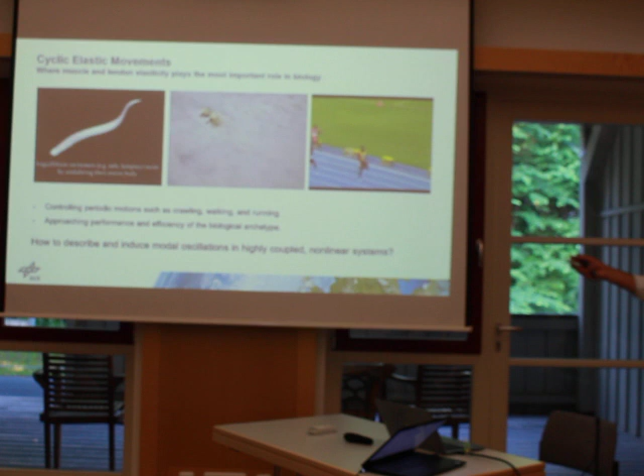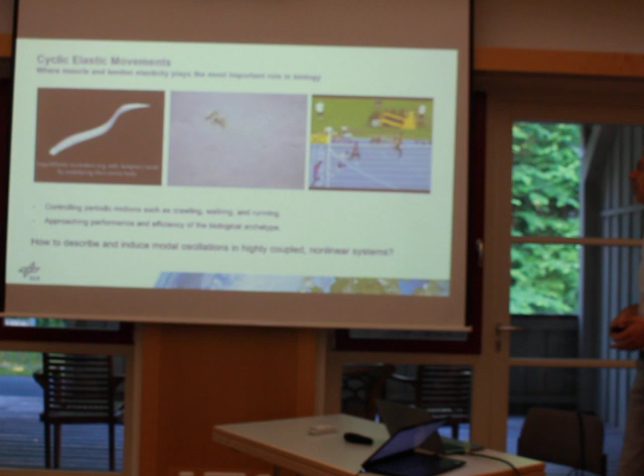So the motivation is well known. Biology uses the interplay between kinetic energy and potential energy to recycle energy over the gait cycle, and this is a highly nonlinear process. In engineering, we were taught about linear modes—everyone knows about linearization and linear modes—but what about nonlinear oscillations?

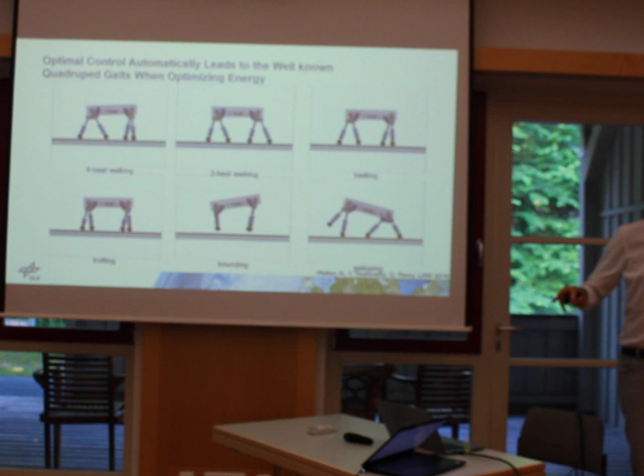We saw a beautiful video yesterday, referring to David's work, showing that for a quadruped, all the typical gaits can emerge. I think they achieved it through pure optimization on simplified models, with zero foot mass and so on. But for a conservative system, you can find initial conditions such that those gaits are just intrinsic motions of the coupled multi-body and elastic system.

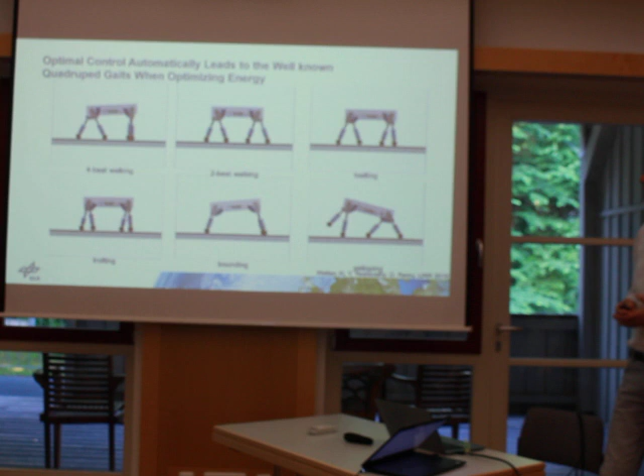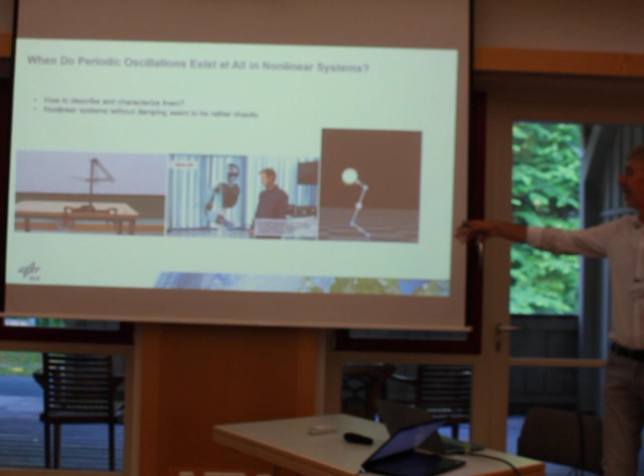So the question is—and it's remarkable—because our engineering intuition about multi-body coupled systems, like a double pendulum for example, is that they are chaotic. You can find on YouTube videos really showing chaotic behavior, and if you simulate that, you see very complex, chaotic behavior. So how does this intuition or experience of rather chaotic motion, when you have almost no damping, relate to the existence of these periodic motions as well?

This was the intriguing question I asked myself in my ERC grant, which will come to an end next year. And of course the analogy is that we model muscles and bones by spring dampers and multi-body systems. It turns out, for me at least, that the mathematical tool to analyze those nonlinear oscillations is differential geometry, and in particular Riemannian geometry on manifolds.

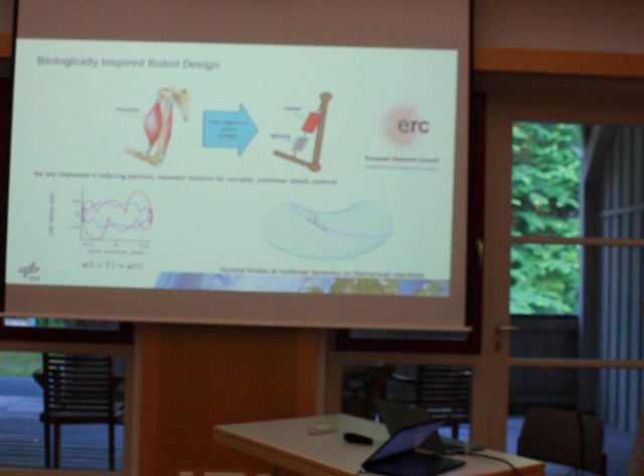So we are looking for periodic motions of highly nonlinear systems, and asking under which conditions they exist and how to find them. This is the main part I will talk about. And the basic notion to introduce here is geodesics.

I assume all of you know, maybe the people with a biological background don't know so much—what's a geodesic? Well, the geodesic is the shortest path between two points, and you get it by optimization. Of course, in Euclidean space it's just a straight line, but you get it by optimizing the integral of the norm of velocity, or equivalently the square of the norm of velocity, over the entire path.

Of course, on a manifold, something which is curved, there's no straight line. So what's the shortest path? Well, on a sphere we know it's part of a great circle, but what about on an arbitrary surface? Well, it's not a straight line, as you can see over here. So probably when you all flew in from the US, you took such a path, which is not a straight line, but is the shortest path on that map, just because of the curvature of the Earth. This is the direction an airplane takes.

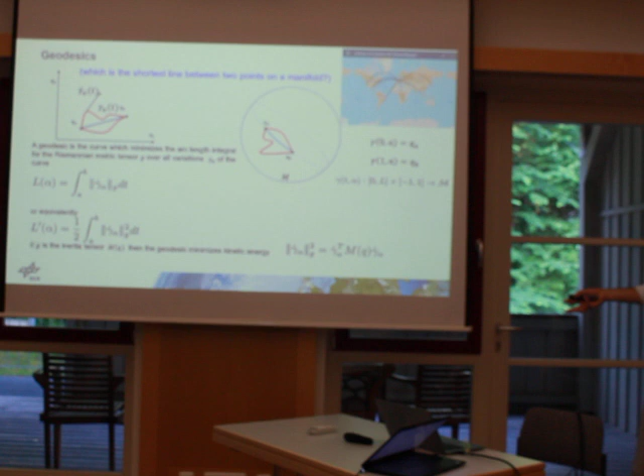And if you take as a norm for velocity the mass matrix, then you have kinetic energy basically. And the shortest path in terms of that, you can define specific metrics, and this brings us to the link between geodesics and multi-body dynamics.

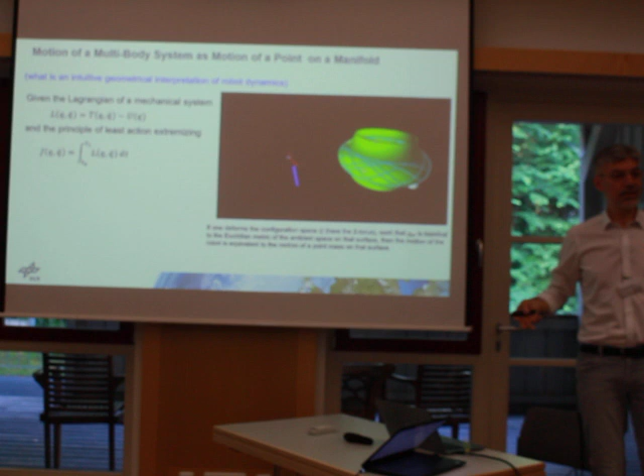Because we have the Lagrangian system, and first consider pure kinetic energy. We know that the principle of least action tells us nature minimizes the integral of the Lagrangian function, and if you have pure kinetic energy, then you minimize the integral of kinetic energy, which is just a geodesic in terms of kinetic energy.

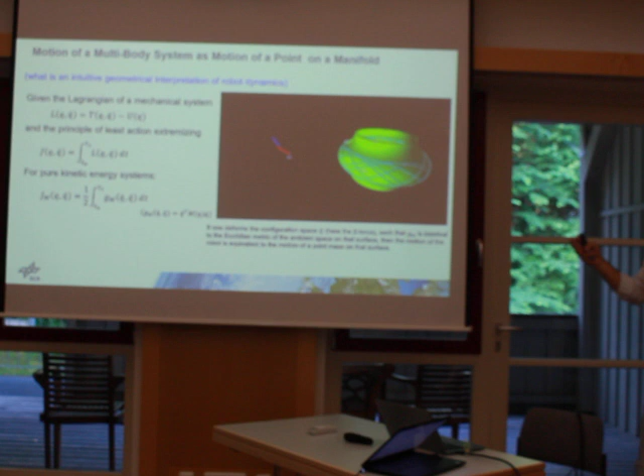So basically you can say that such a double pendulum is the same thing as the motion of a point mass on a manifold which is curved by the inertial tensor. By the way, we're not doing relativistic robotics here, but Einstein used the same interpretation in a different setup—the idea is the same: that a variation of the metric tensor can be represented as a space which is curved, and then you get rid of all this multi-body complexity—you just have a point mass and some curved surfaces.

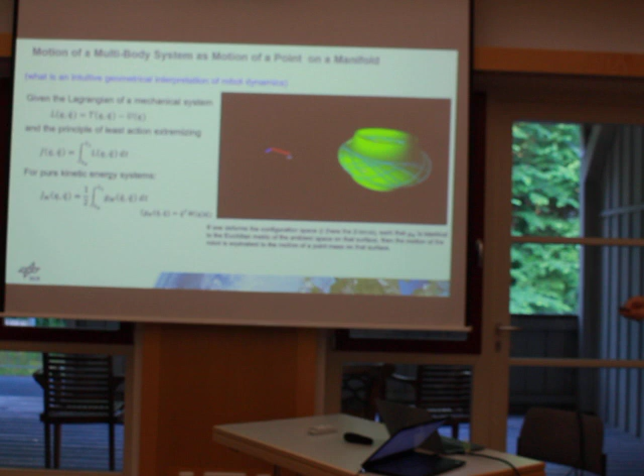And so the trajectories of freely moving multi-body systems, which are conservative—everything goes for conservative systems—are geodesics with respect to the inertial tensor.

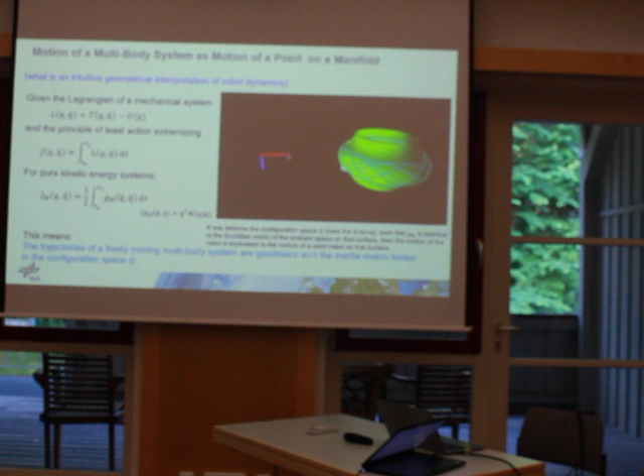For people used to motion planning, we know that having a cost function which varies leads to shortest paths which are variable. Now the question is, what if you have potential energy? How does this change?

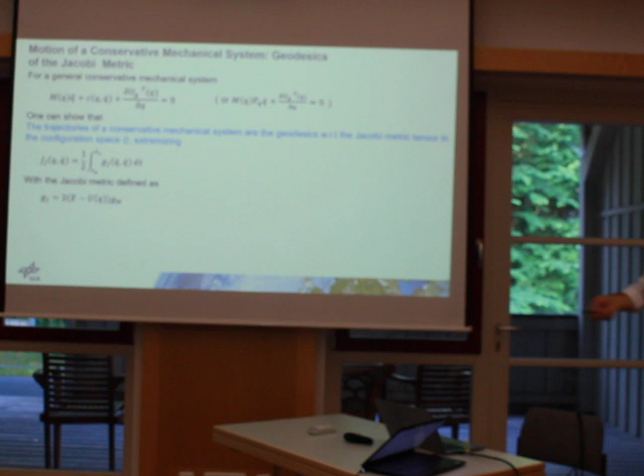This is known since the time of Jacobi. He defined a Jacobi metric, and instead of just using kinetic energy, you use this metric, which is the constant energy minus the potential energy, times the mass matrix, where the 2 is for historical reasons. This is your cost function, so to say. You minimize the path under this cost function. The interesting thing is that you can reduce the motion of a multibody system in a potential field to just the motion of a point in a curved configuration space.

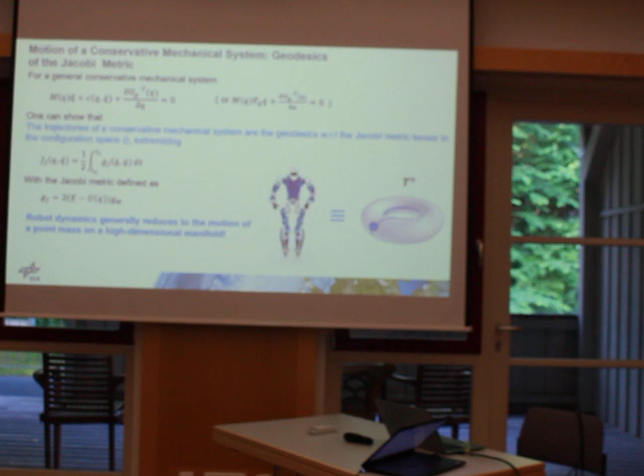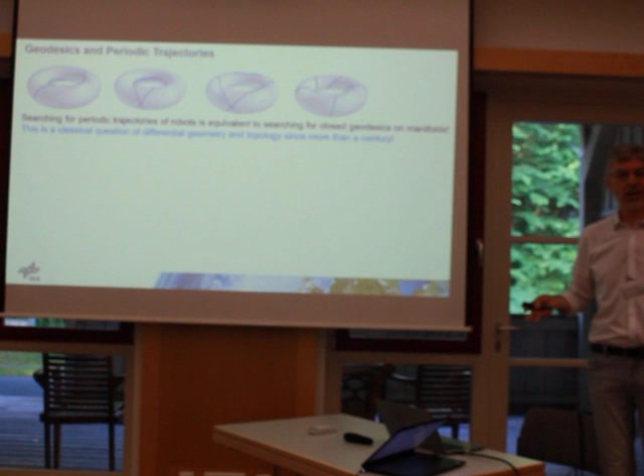So let's see what insight springs from this. The main point is that mathematicians have looked at periodic geodesics of all kinds of manifolds for more than 100 years, and there's an incredible amount of mathematical theory on the existence of periodic geodesics. For us, this means existence of periodic motions for multibody systems.

The classical example, which I saw in the book of Arnold like 20 years ago, is: if you take a double pendulum and pick two numbers, n and m, you will always find a periodic trajectory of this double pendulum which turns n times around joint 1 and m times around joint 2. The explanation is just take a rubber band, wrap it around your torus, which is the configuration space, and let it contract to the minimum length. This will be your closed geodesic.

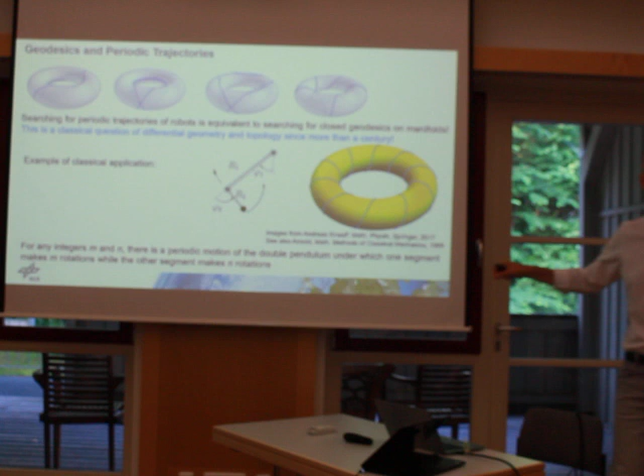Is this without gravity? No, it's with gravity, because if you take the Jacobi metric, it's with gravity—gravity, elastic springs, put whatever you like, potential and kinetic energy. If you have gravity, you use the Jacobi metric; if you don't have gravity, you just use the mass matrix. So it holds for what interests us.

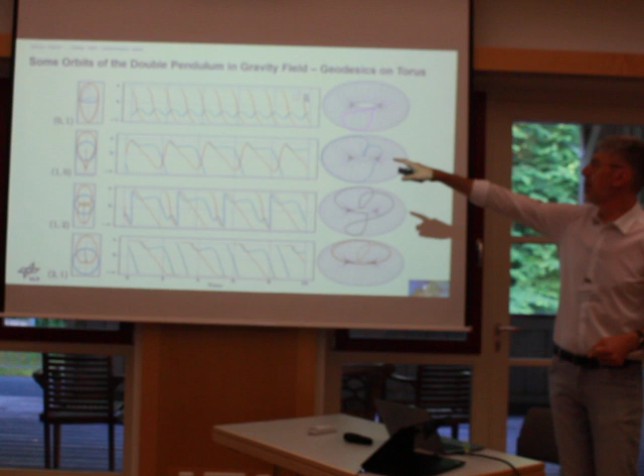And then I asked Arne, one of my PhD students, to show me those double pendulum trajectories and contract those rubber bands—I wanted to see them. These are for n and m equal to 0,1, 1,1, and so on, all these pairs. That's how they look on the torus. You just let it contract because the metric is, as I said, variable. They take some strange shape.

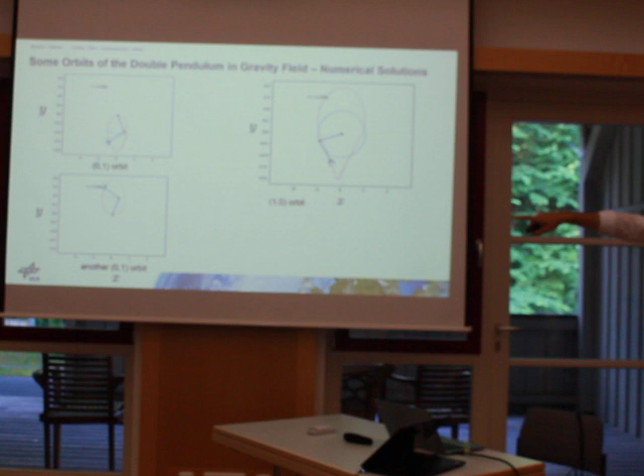But you might like to see how they look: 0,1, 1,0, another 0,1. So they are not unique. The theorem tells you that at least one exists, but sometimes there might exist a lot of them.

And of course, remember we started by saying the double pendulum is chaotic. Yes, it's true, but mathematicians tell me that in the middle of chaos there are theorems showing you have isolated points of stability. Even more of them start to be funnier and funnier: 1,1, 1,2, 2,1. Remember, these are intrinsic motions—you don't put any power into it because you assume they are not dissipative. This is what a double pendulum does by itself, and you can go up to any dimension. They exist.

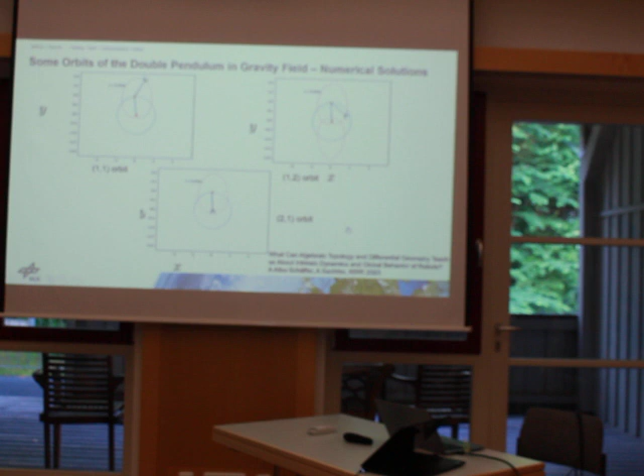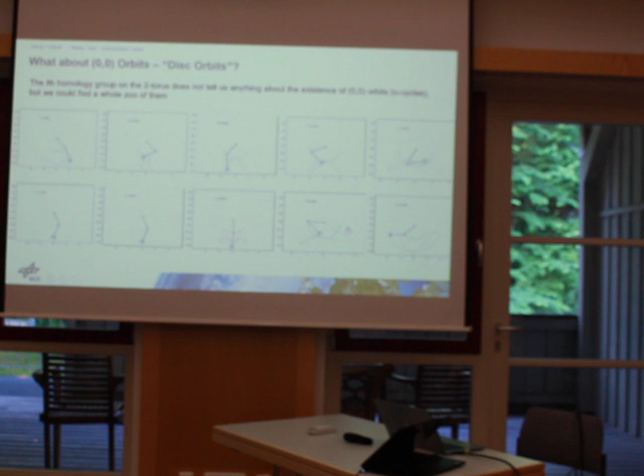Even more of them—let's see. Oh, I'm sorry, where was it again? Oh, the animation is too slow. Okay, what about 0,0? Those exist because our joints don't turn endlessly. So are there periodic motions which don't do full 2-pi rotations? Plenty of them—you can find plenty, again using rubber band contraction instead of Poincaré maps or multiple shooting. This is valid only for conservative systems.

Now the first application, which is related to robotics. There's a beautiful paper by Hatton and Choset. They analyzed how to move this kind of snake robot with non-holonomic constraints to maximize velocity. We asked ourselves, if I put some springs in there, could you find periodic motions where, assuming no friction, it would oscillate by itself and move forward?

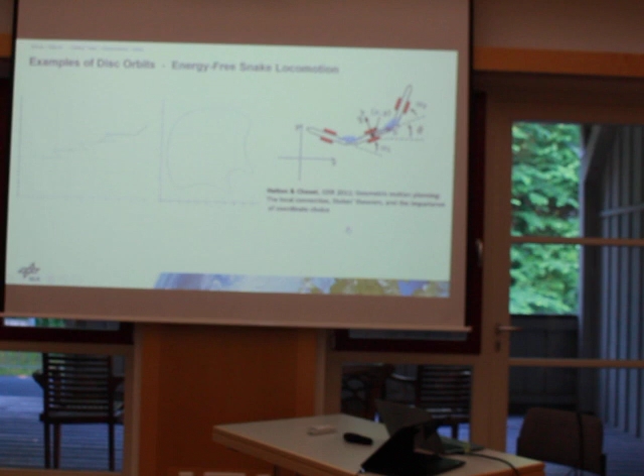And this is one of the solutions—you see the snake over there. You give it some initial condition, and this is the trajectory in configuration space, Q1 and Q2. They have shown that you need to maximize this area, due to the Green's or generalized Stokes theorem, but you can find that.

So far we talked only about trajectories of circular shape, like closed curved flows. However, there's a big class of curves which have a line shape, with two endpoints. These are the two topologies curves can have.

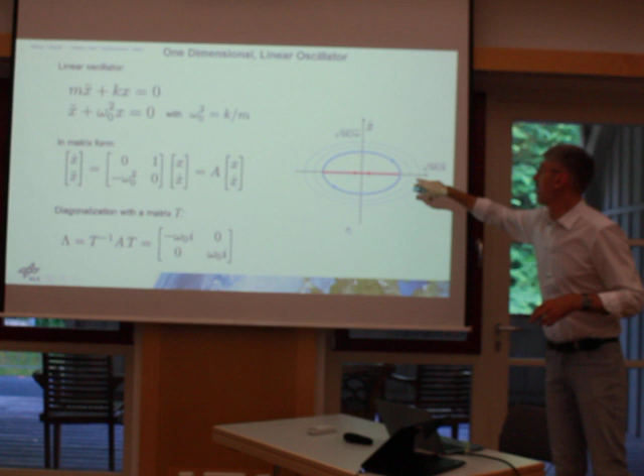It turns out that these are generalizations of the linear modes I was talking about before. We all know linear modes: in one dimension with x and x-dot, you have oscillation with constant energy, giving an ellipse. In configuration space, the system just goes back and forth on a line. If you have a 2-degrees-of-freedom system, you'll have two lines corresponding to the two modes: one in-phase, one anti-phase, and the system oscillates on those lines.

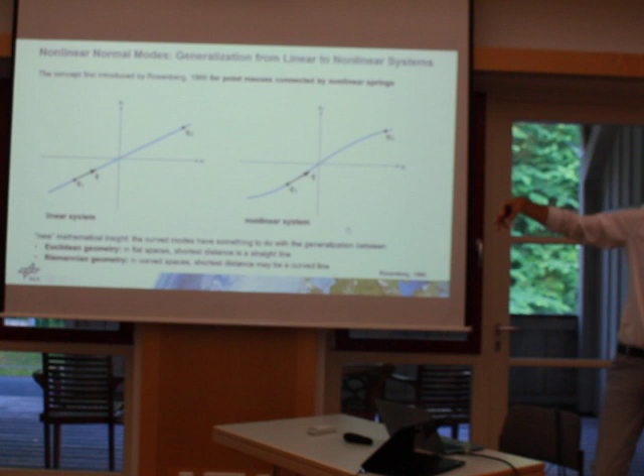What's the generalization to nonlinear systems? Everyone in engineering knows that for an n-degree-of-freedom system you have at least n such modes, possibly infinitely many if it's degenerate. For nonlinear systems, because the metric curves the space, you won't oscillate on a straight line but on a curve. Still, if the amplitude grows and linearization no longer holds, this property—that you can find n lines on which the motion is extremely simple—still holds.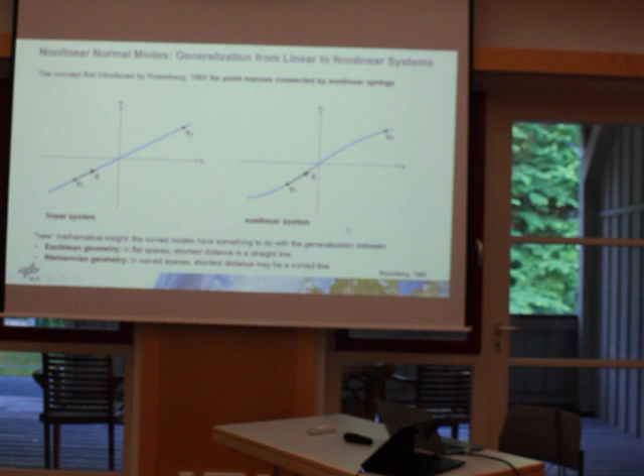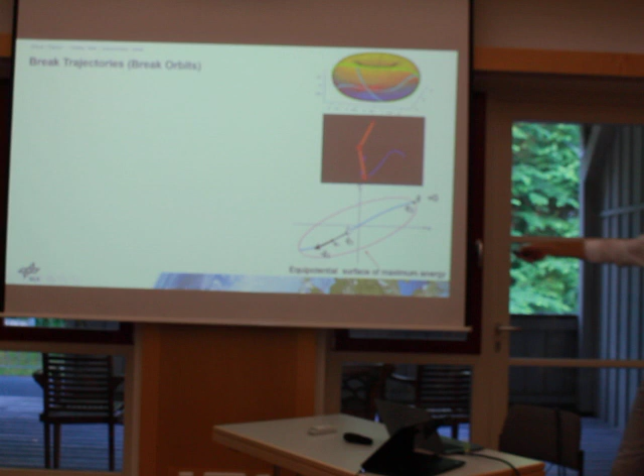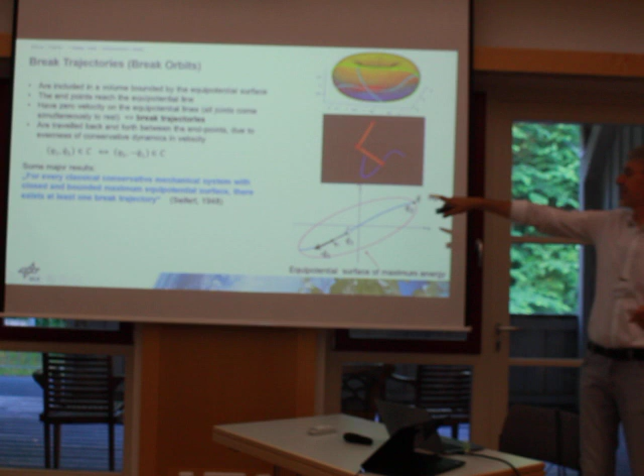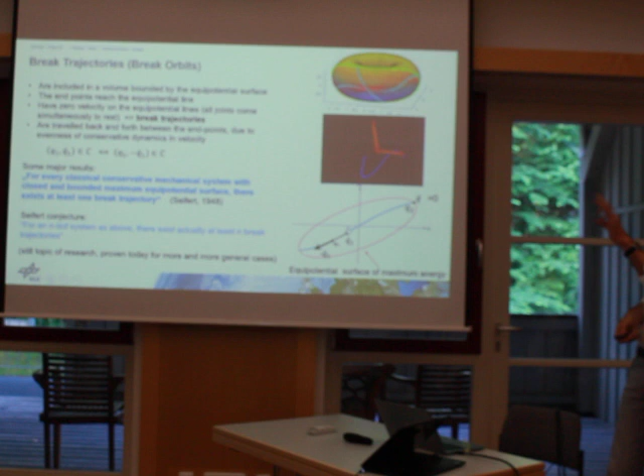In mathematics, people call these break orbits, or break trajectories. They start at zero kinetic energy, end at zero kinetic energy, and oscillate back and forth—like the swinging of an arm or a leg moving on such a break orbit. A mathematician named Seifert, from Heidelberg in 1948, proved that for every multi-body system you have at least one such trajectory, and conjectured that for an n-degree-of-freedom system you have n, just as for linear systems. Mathematicians still struggle to prove that conjecture—you can find proofs attempted on arXiv even today—but we have a MATLAB toolbox where, given the dynamic model, you can compute all n modes, and it seems the conjecture holds.

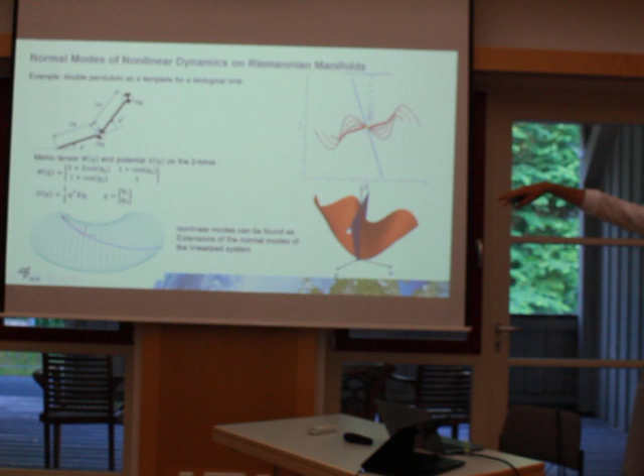If energy changes, those modes will also change. Here's how they look for our simple double pendulum: the crosses are the two linear modes, and as you increase energy, they start to bend. You can also display this in 3D. One mode looks like this, which is the in-phase mode, and the other mode looks like this, or something like it.

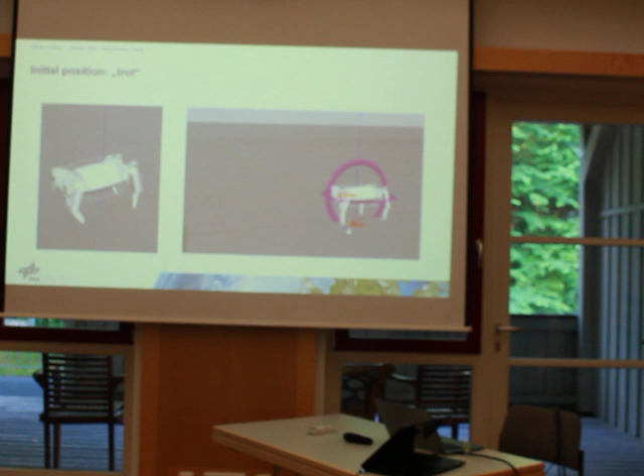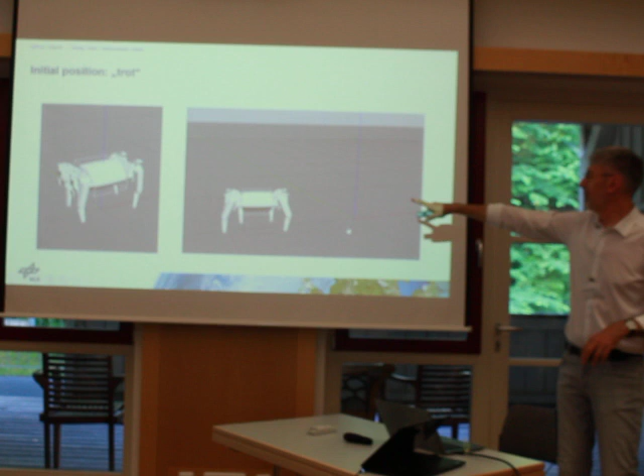How does this look for a more complex system—now coming to our prototype? If you attach the legs to the ground with ball joints, you have 6 degrees of freedom left, and these are the 6 modes the system displays. This is still preliminary and unpublished, but if you release the legs on some of these modes, the system starts to do this kind of thing by itself. It's not a mode of the free-floating system but of the fixed system, yet it still produces these behaviors—this is the most fun mode, and it somehow seems to evolve into walking.

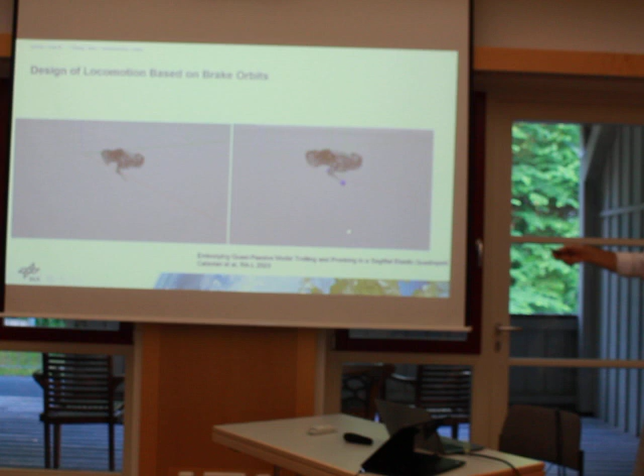Davide presented something about designing locomotion based on this kind of mode—how to excite them, of course. These are conservative systems, so that's a central assumption, and this whole idea holds if you have systems with little dissipation.

The idea is, instead of controlling things at 1 kilohertz—micromanaging the swing by hand at high control rates—you just input the kinetic energy needed to keep a constant level and let it swing on its own oscillation. That's the idea, and the simplest way to do it seems to be with just some impulsive bang-bang control.

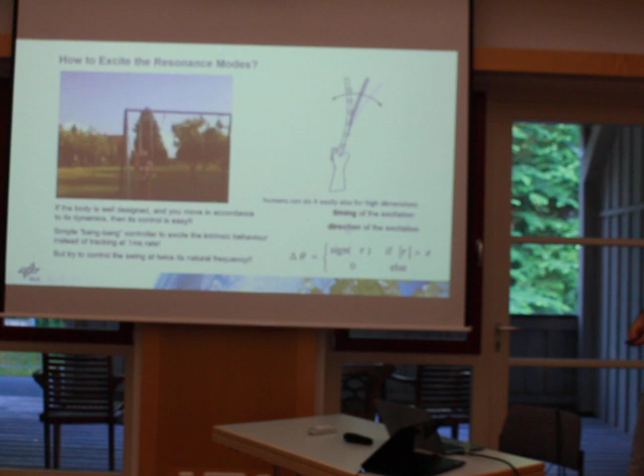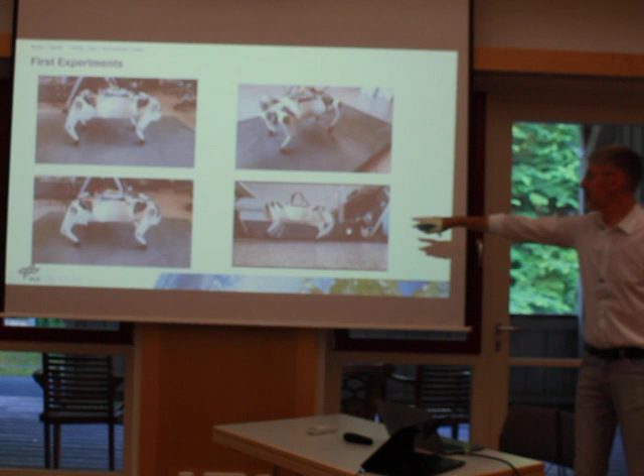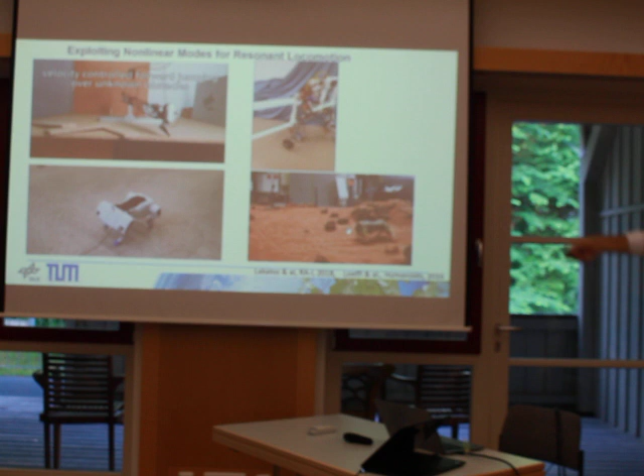These are some videos of this very preliminary system—the modes excited, and some first motions based on those modes. With some of our previous PhD students, Dominic, Akarosh, and other colleagues, we implemented what you saw yesterday: we can show that walking, trotting, and galloping can be generated around those modes, not exactly on them. I'm not completely happy yet, but you can generate some locomotion patterns this way.

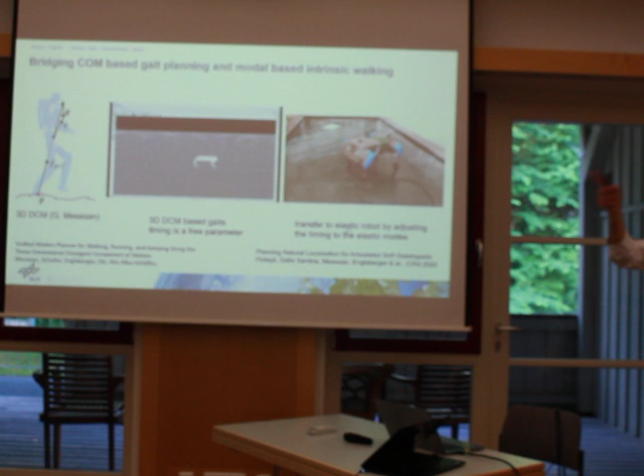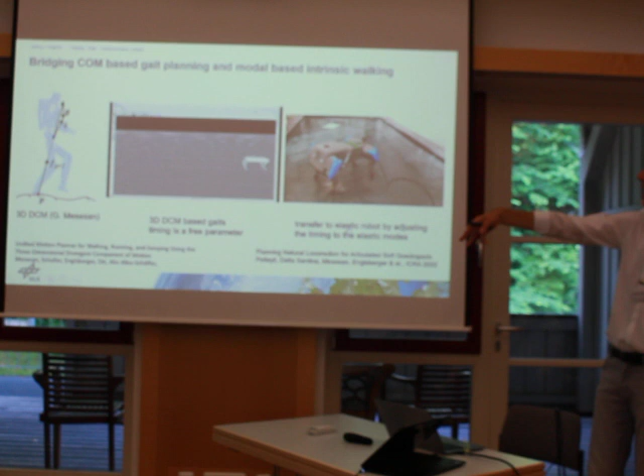George has shown a completely different approach—planning for the center of mass, and similarly with Johannes, generating those trajectories. So we are looking at how to bridge this approach with oscillations.

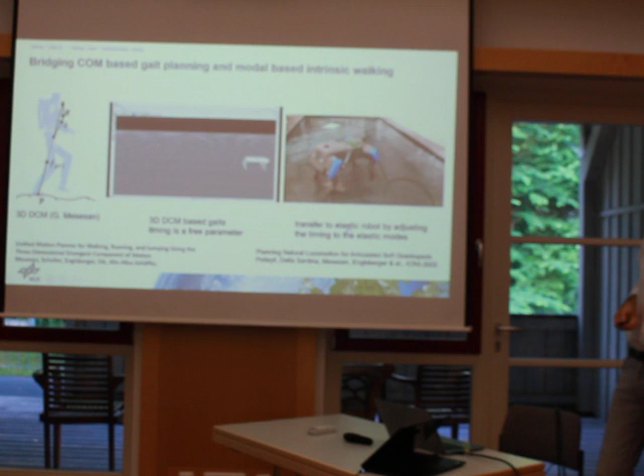And we have some preliminary paper where the center of mass trajectory has a free parameter, which is the timing, and you take the timing from the oscillations. The last link is to Antonin's point, he's challenging us because he's doing everything with learning.

This works fantastically without any theory on oscillation modes, so he's setting the benchmark. You have seen the beautiful presentation yesterday. Still, I hope this idea brought you some insight. I'm curious to see your opinion on that. I've shown you a zoo of periodic motions, and the question is, how can we use them in locomotion? And finally, can we really use that to explain biological motion? Thank you very much for listening.

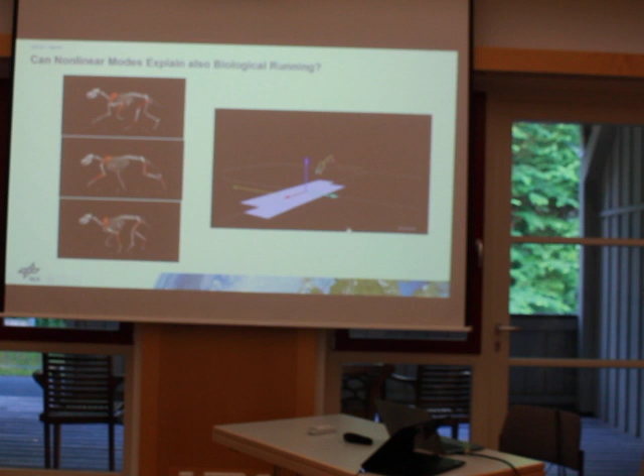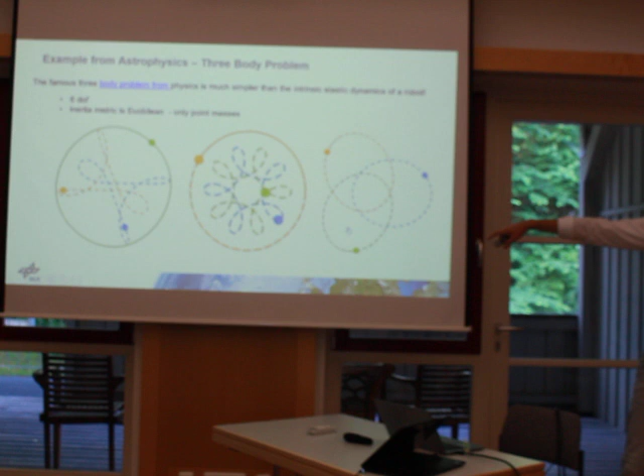We're running a little bit late. We have 3 minutes for questions. By the way, the three-body problem, these are periodic trajectories of the three-body problem, which is much easier than our oscillation of robots. Yeah, go ahead.

Please, Anna. So what do you think about the role of muscles in using and benefiting from this underlying dynamics? If you assume muscles are springs, and to some extent dampers, then you need to re-inject energy. So I ask myself, maybe the muscle distribution is such that the stiffness matrix results in a way that the modes correspond to something meaningful. There's also a hypothesis we are trying to verify.

The extension to dissipative systems, when you have the feet leave the ground on those robots, there's energy lost, so you have to pump energy in. Your hypothesis is that when you take your conservative system and perturb it with some dissipation and injection of energy by some strategy, you'll still get a continuation of those modes. That was a hypothesis you're making, is that correct?

Yes. The question is, do you think it's a good idea to look first at a conservative template and then try to compensate energy? If your system is mainly dissipative, this idea doesn't work, right? So you need to build robots which are close to conservative, and also design gaits where you have little impact.

Let's say the David Remy thing you showed, if those feet had mass, he couldn't have those solutions anymore because he would have dissipation. You think if you put in a little bit of energy by some random means, but fixed, you would still find his solutions, for example?

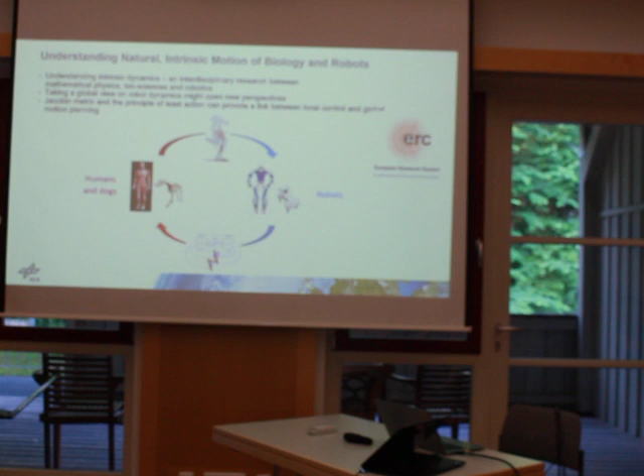Please, go ahead. Maybe adding to this question, have you thought about how to quantify the amount of dissipation? Because the more dissipation you have, you also get some coupling between different modes, right?

So the point is, what we have seen, a little bit of dissipation is good, because whatever error you put into the conservative system, it never forgets the mistakes you have done once. If you have a little bit of dissipation, then this has some forgetting factor. So the best is you have a little bit of dissipation and re-inject the energy. If the dissipation is too big, then at some point you better design your controller from the beginning, taking dissipation into consideration. That's the big point to be debated about, I think.

Yeah, please, that's the last question. I'm sorry, coffee break. I'm happy to answer all the questions in the coffee break. Please, the last question was still there. Really briefly, I missed a little bit of the talk.

I was wondering, to do the rubber band contraction, what type of algorithm is that? Does it solve a PDE in order to do the contraction on the curved manifold?

Well, it's a different way, right? You solve it globally. Usually you integrate step by step, while for the rubber band contraction, basically you solve it between the initial conditions at once. So still you have iteration, but instead of iterating in time, you iterate in space.